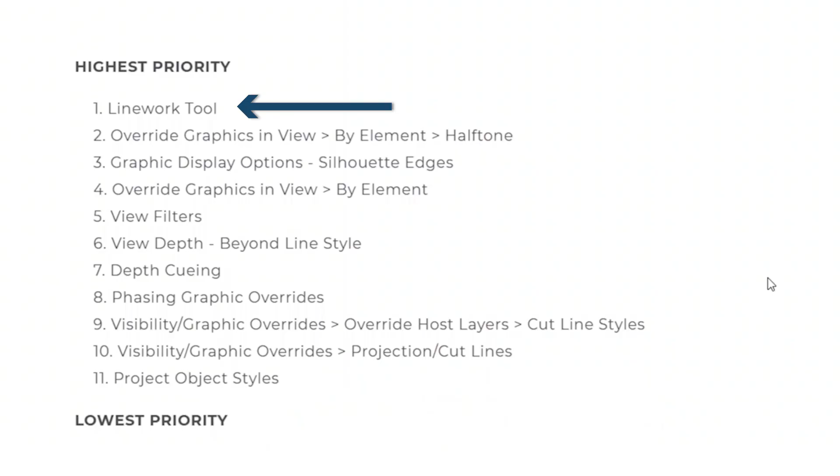So you can see we have this list here, highest priority to lowest priority, 1 to 11, so 1 being the most important that it's going to choose over any other graphic override, and 11 being the least important in Revit's eyes. So we'll start with number 11, project object styles.

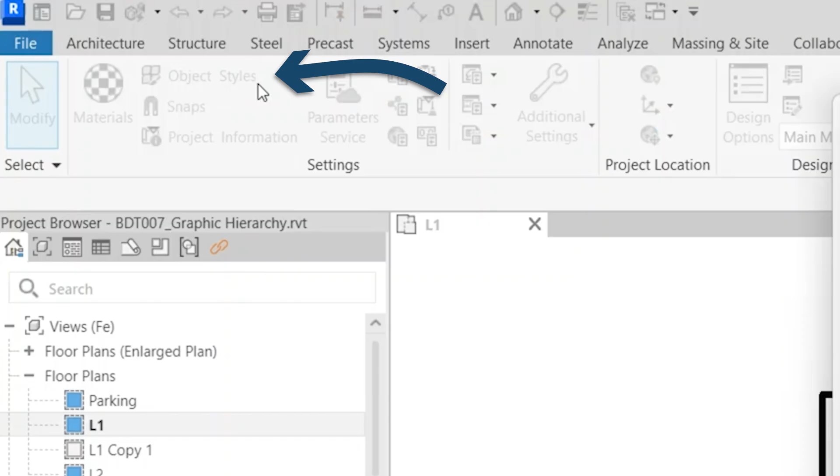So if we hop into Revit, really everything, the project object styles, they are the baseline for how Revit chooses to show an object. So this is, if nothing else is applied, this is how it's going to show. So where you access that is within the Manage tab, Object Styles. And here you can see a whole host of elements here. It's really going to show everything.

So right now we're in architecture. If we want to show more, we can add MEP, infrastructure. So these are all the actual physical elements. We have annotation objects, analytical model objects, and imported objects. To go back here, to take, for example, walls here. So we have the line weight, projection, and the cut lines.

Projection lines, so this is going to be things like in an elevation or a section view where you can see a wall in the distance, but we're not actually cutting through it. The cut line is going to be things like in the plan. So right now we can see these walls, they're cut pretty thick. So this is a level 5 line weight, whereas the projection line is number 2.

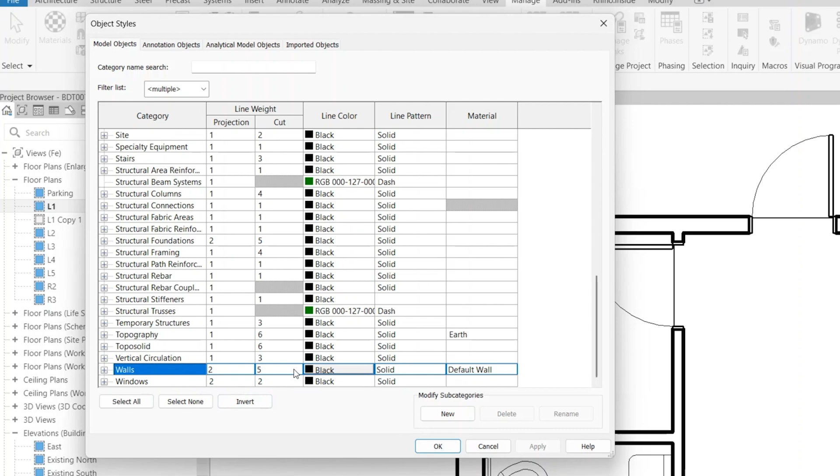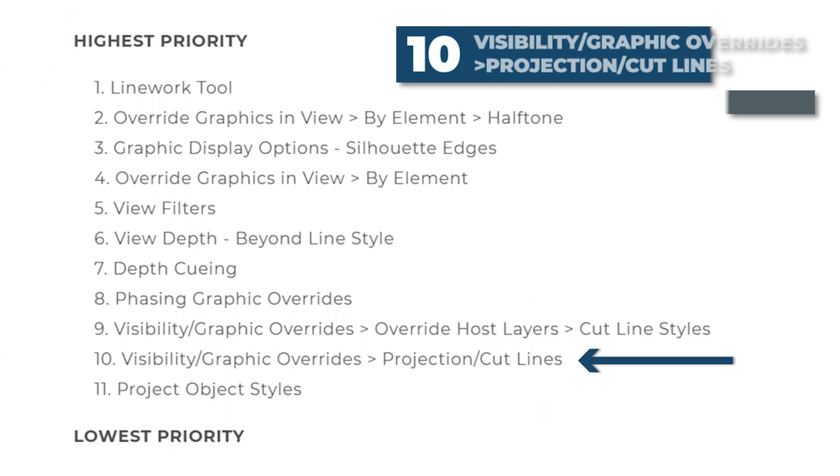So this is, again, it's the baseline. So this is how things are going to show throughout the project. And then the overrides are what are going to change them per specific views or specific view templates, things like that. So number 10, visibility graphics overrides, projection cut lines.

So where you access that is within your properties dialog box within Revit. You go to visibility graphics override. You can also hit VG on your keyboard. So if we come down, you'll notice this looks somewhat similar to the object styles dialog box, but there are more options here. So within here, you also get pattern and transparency control.

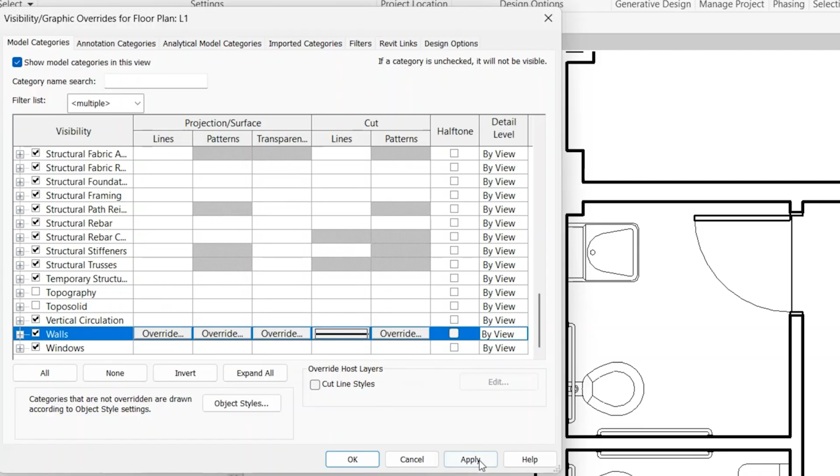You can do lines similar to the projection lines within object styles, but this is really going to be specific for that view. Alternatively, if this is applied to a view template, then that'll apply for all the views that view template is applied to. Cut lines, similarly, you can control the cut lines and then also the pattern. So click this override. Say we want it back to a number 5 line weight, click OK, apply. You'll notice that we're now back to the number 5 line weight here.

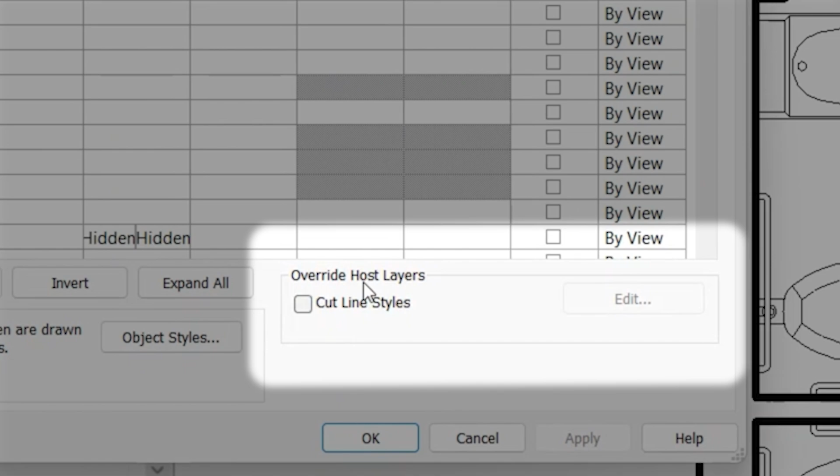Number 9, cut line styles. So this is within visibility graphics override again. You'll notice here, override host layers down here. We will click on cut line styles, click OK. So right now you can't actually see this because of the level of detail within the drawing. So to change that, we will go to the fine level of detail.

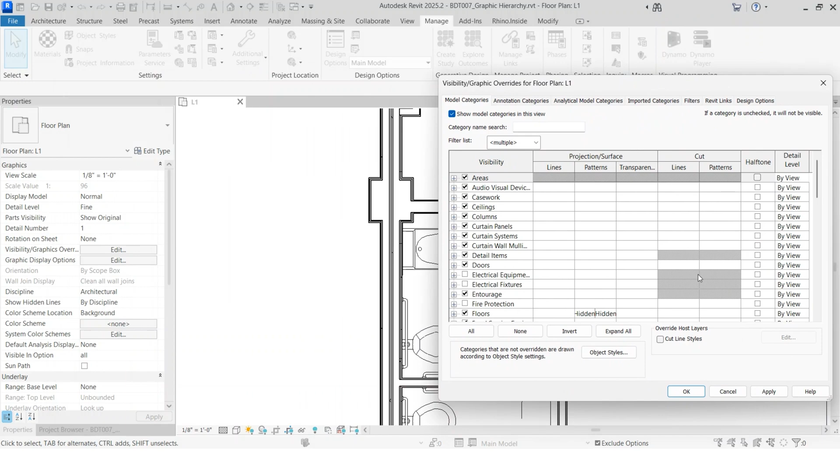So you'll notice now that when this is cut, we're cutting through all the different layers. So gypsum board, CMU layers, everything that wall is made up of, it's kind of made up of all of these different layers. So if we go back to visibility graphic override, uncheck this, click apply. So without the override here, you'll notice that we have really thick outline and then thinner interior lines of the wall assembly.

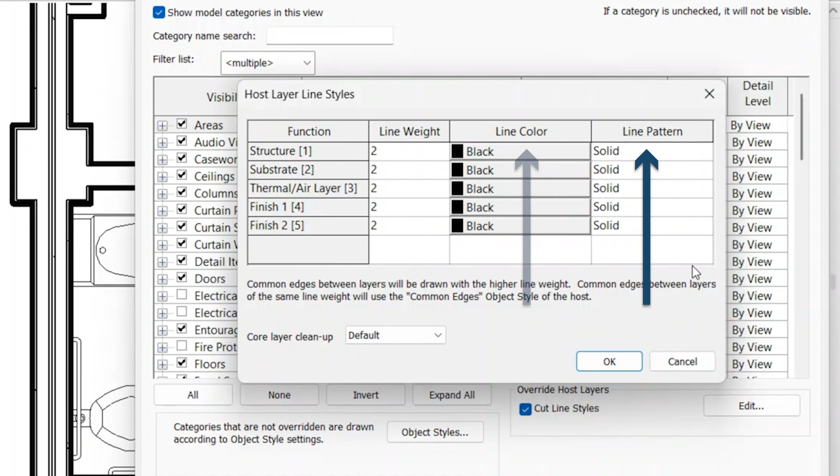So really what this override host layer does, if we click edit, you'll notice within here, this should look really similar for when you're building a wall, ceiling, floor, roof, things like that, those main assembly pieces in Revit. You'll notice that all of these have line weight control, line color, and line pattern control. So we're going to make another video for this, so we won't go into the details, but just know that this is one step above your normal visibility graphic override.

Number 8, phasing graphic overrides.

Within Revit, we have things called phases. So this is really for projects that have multiple phases, or say you're in an existing building and you're doing your new project. So you have things that are existing, things that are new, things that are being demolished, things like that. So within here, under the Manage tab, Phases.

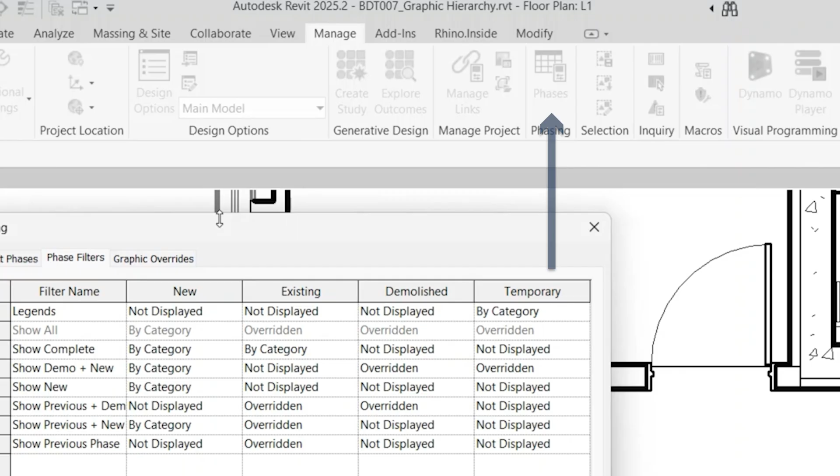So within the phase filters, there are quite a few different settings that we can have applied here. Within this, we can show all. This is generally just going to show everything. So over here, it's essentially saying, how do you want to show that particular thing? So right now, by category, that's saying don't have any override.

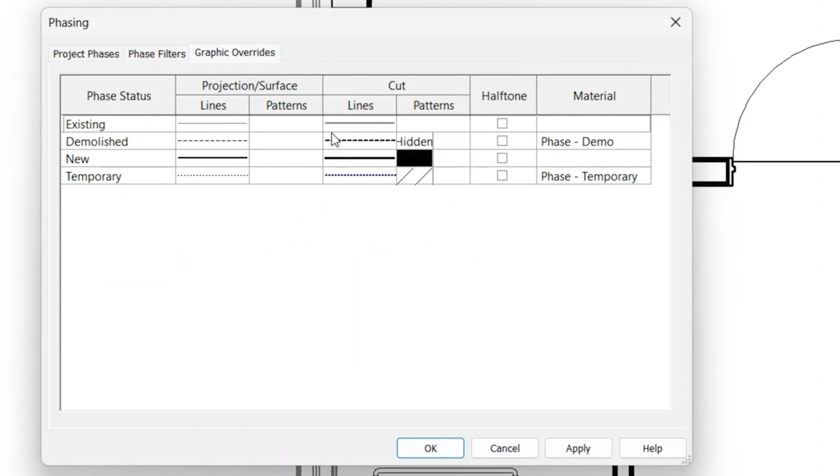If we switched it to overridden, then whatever we have in these graphic overrides here, it's going to show it with that value. If we have an override for a line projection, pattern, cut, things like that, it's going to show that. And then not displayed, it's just not going to show it at all. For example, show complete, we're not seeing any of the demolished or the temporary work. So we'll go back to this.

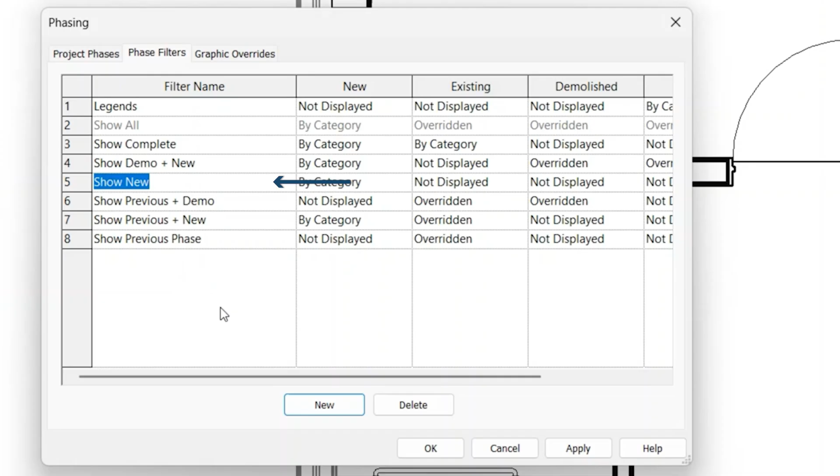So within this, we have loads of different things here. So show demo and new, we want to see the new work and the demolished work. Show new, so we're only showing new work. Show previous and demo, that essentially means that we're going to see the existing building and what's being demolished.

Show previous and new, so that's going to show us the existing building plus the new construction, but it's not going to show us any of the demolished elements. And then show previous phase, so that's going to show us the phase previous to the one that we're in.

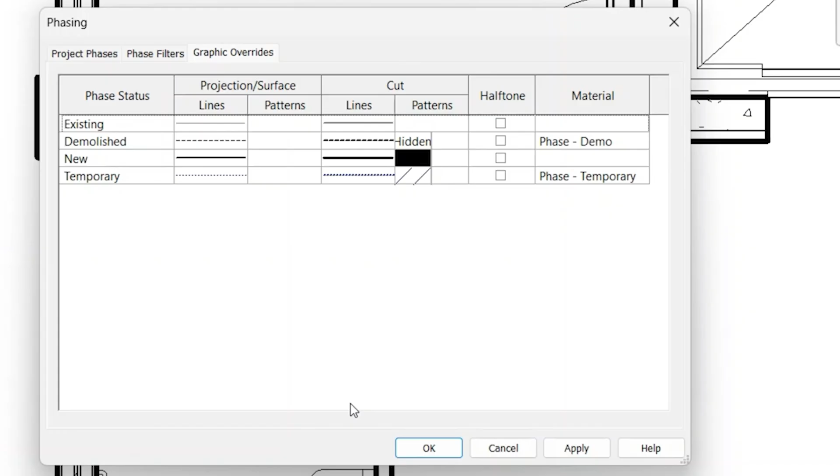Graphic overrides. So you'll notice here that you actually have the option to change an object's appearance just based off what phase they're in. Let's go ahead and leave these as they are, and then we can play with these. So if we click on a wall, right now it's phase created, new construction, and it's not phase demolished. So let's go ahead and change this to existing.

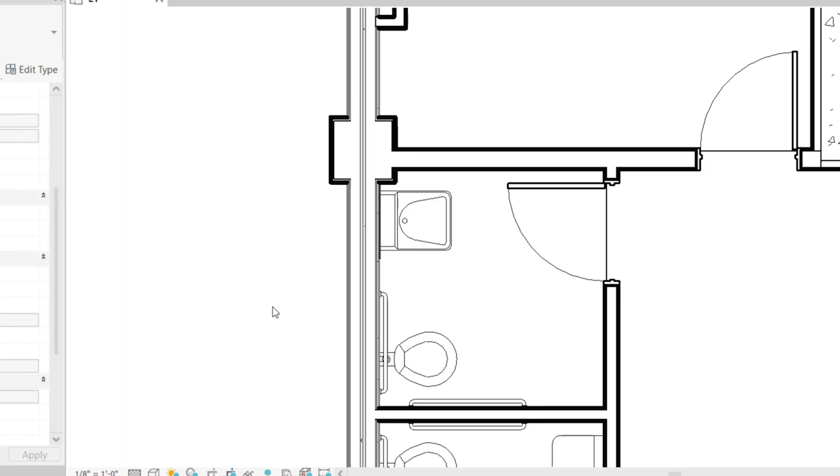So now that this is existing, you'll notice that this whole wall just turned gray. Essentially what that's doing is telling the contractor or whoever's reading the drawings that this is an existing wall. Similarly for the previous ones, you have both lines, patterns, and then projection versus cut. You can halftone it, so that's a setting that you can set. So that actually reduces the value of that color.

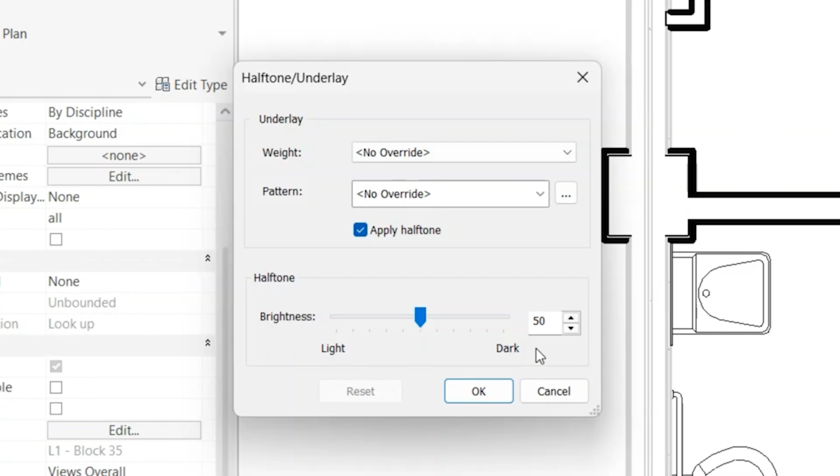So where you set that is in additional settings, halftone underlay, and then here, halftone, you'll see brightness, light versus dark. So if we go all the way dark, click OK, it'll go back to that original gray color. If we go back into halftone, go all the way light, it gets extremely light. So within that, we also have some other things here.

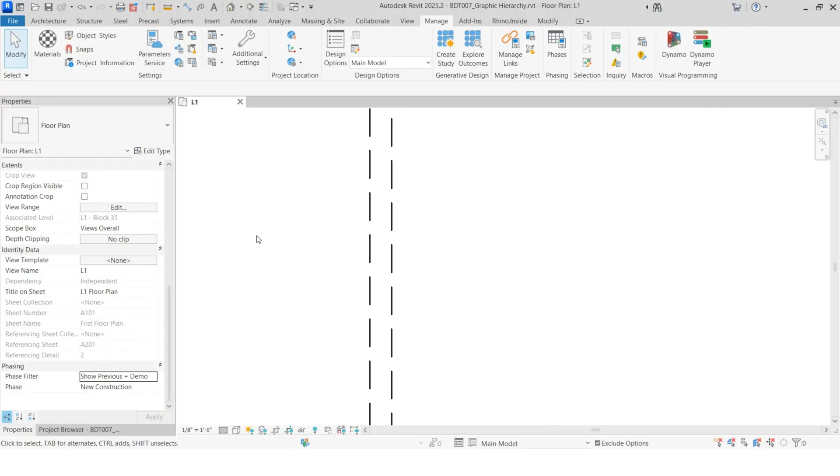So demolished, let's check that out. So let's say this wall is now supposed to be demolished in our new construction. So you'll notice now that you can't actually see it. That's because this view is not set up to see that. But if we switch over to our demo view, you'll notice now that this wall is scheduled to be demoed.

So new, if you're overriding this, it's going to show everything that is new construction as a singular line type or material or halftone. Our temporary, so this is an interesting one. So level 1, let's say we have a temporary wall that we want built out for construction purposes. We can show this as being built during the new construction, but then once construction is complete, we actually want that removed.

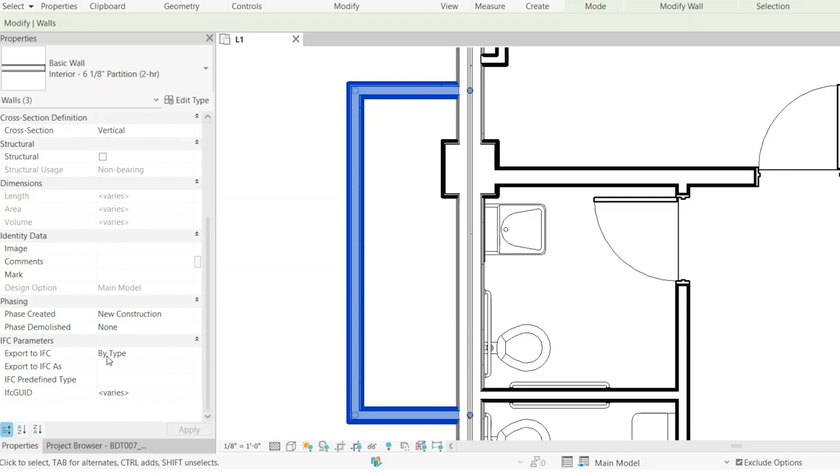So if we do phase created new construction and phase demolished new construction, here it's disappearing, but we will want to change our phase filter to show it. So currently we are set up as show previous and new. So let's go ahead back to our phase filters.

So right now you can see temporary is not displayed. Let's go ahead and switch that to overridden. Click OK. You'll notice that it's now showing it in this particular way because that's how the overrides for temporary elements are shown.

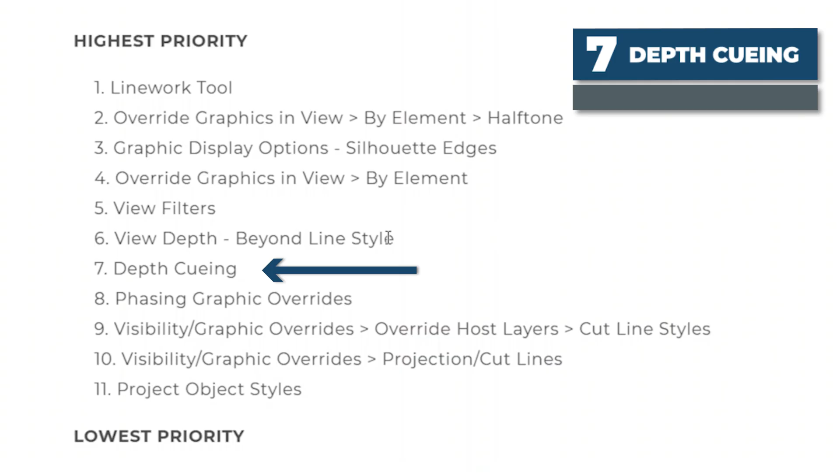Coming back to our list, number 7, depth cueing. So this is an interesting one. It's really quite helpful in more presentation-based things. We'll show this in an elevational view. So if we look here, and maybe just a little bit of context in this model here.

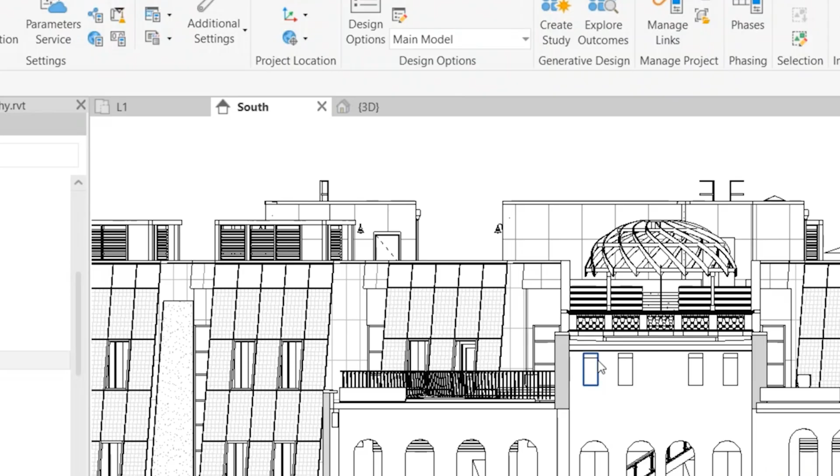So there are quite a few layers here. There's an existing building front. We have a secondary layer here of some more buildings and then penthouse areas. So essentially what we're seeing here is a lot of information that spans over potentially quite a bit of distance here. But right now, the way that we're set up, we're actually showing everything all as black and really strong. So it's kind of hard to understand depth within this drawing.

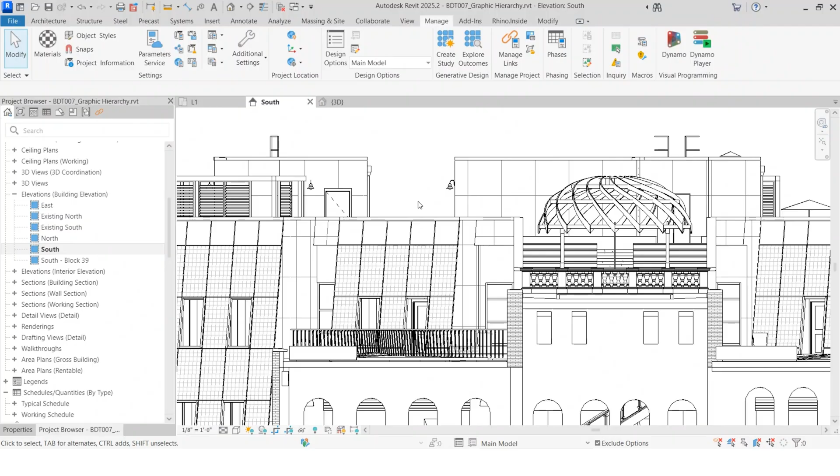So depth cueing essentially starts to fade out some of the portions in the background, and it really lets the pieces in the front start to stand out. The way that you access this, at the bottom here, you click on graphic display options, click on depth cueing, and then check the box that says show depth. Click apply. And now you notice that once we clicked apply, a lot of the stuff in the background started to gray out, almost like a halftone. And you can start to read the stuff that's up front much better.

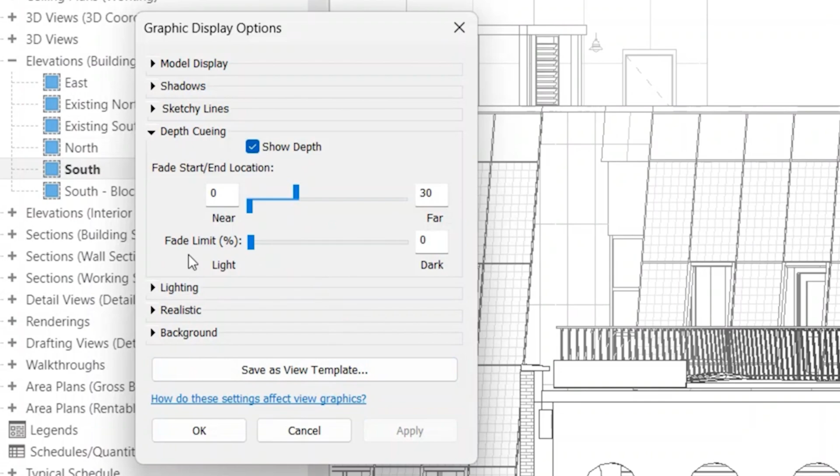So there are some options within this. This here, fade start end location. You can start to play with this and really see how it works. It controls how much the objects in the background and foreground are faded out. And the more you play with this, the more you can see. There are definitely some advantages of doing particular things over the others.

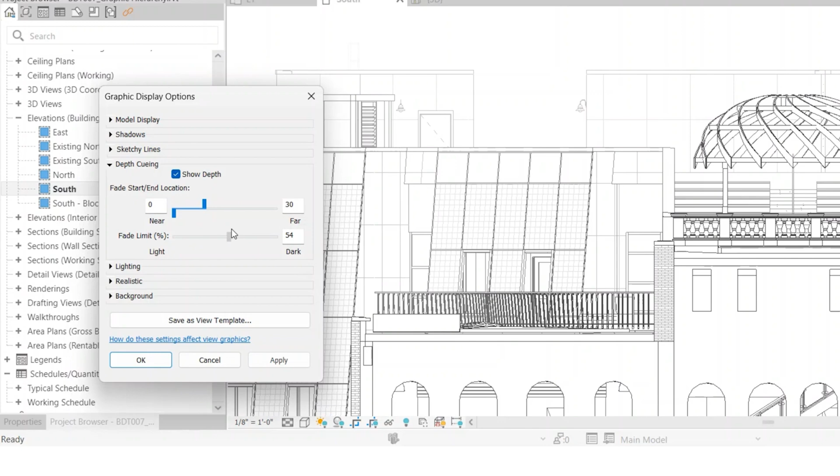And then there's also the fade limit percentage. So right now we're at 0%, so light, and then if we go all the way dark, click apply, you'll see that comes really present again. So this essentially just shows the limit of how light it's going to make that furthest element.

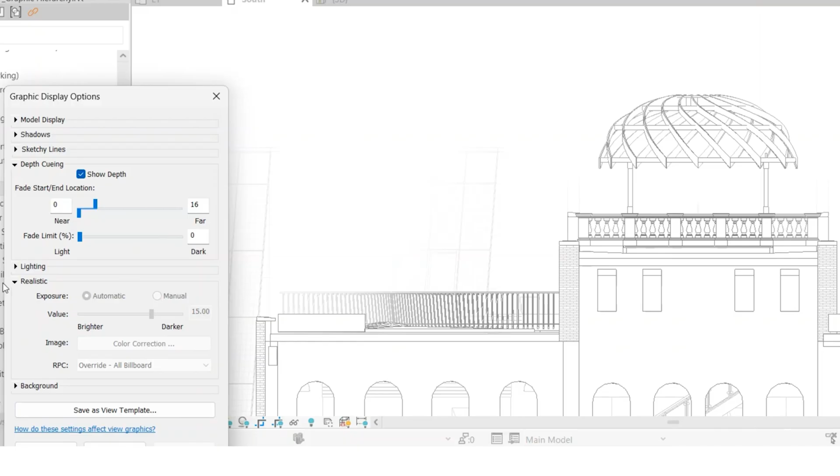If you play with this slider a bit, you'll start to notice that you can completely fade out certain objects here. If you get to a depth that is shorter than the furthest elements within the model, it's actually going to completely hide them. But as you start to grow this a bit, you can see more and more elements. For example, this guardrail here is barely visible, so we know that's right at the precipice of where this limit is set. And then fade. We can control how much that actually fades things out.

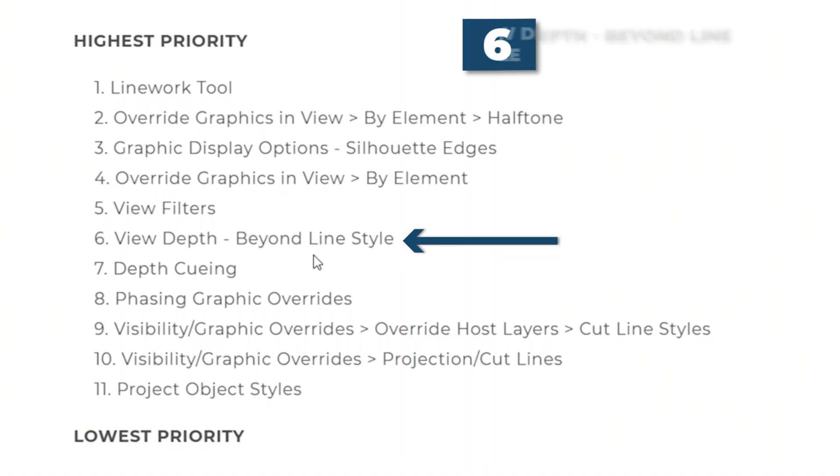So number 6, view depth beyond line style. This is also an interesting one. Let's go to a different level here. There are some objects that are low. This right here is a double height opening. You can see a corridor here, stairs that are going downwards, and then double height stairs. Right now you can see there are some objects, some additional stairs, and some guardrails.

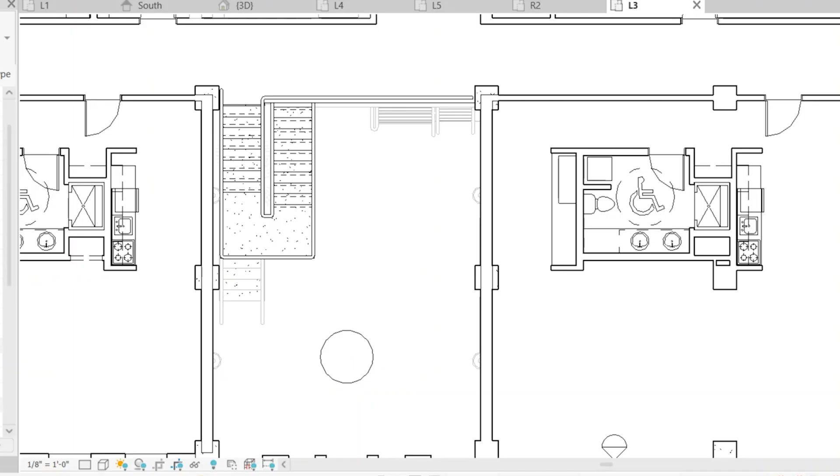Essentially what view depth is doing is showing the objects that are in that further distance as a lighter color. It is a little bit different from depth cueing; it works in a different way. So if we go to our view range, click edit, and then show here, you'll notice that Revit has this diagram, and it shows you all of the different categories that are associated with these parameters. You'll see here, number 6, view depth. View depth is essentially this area in yellow.

Just to explain some of this, your top one, the primary range top, is this parameter here. It's essentially where the camera is set up when you're looking down in a plan. Number 2, primary range cut plane. That's this line here. That's actually where you're making your plan cut, whether that's cutting through a wall, door, window, etc. That's where that cut's happening. And then your camera's up here looking down.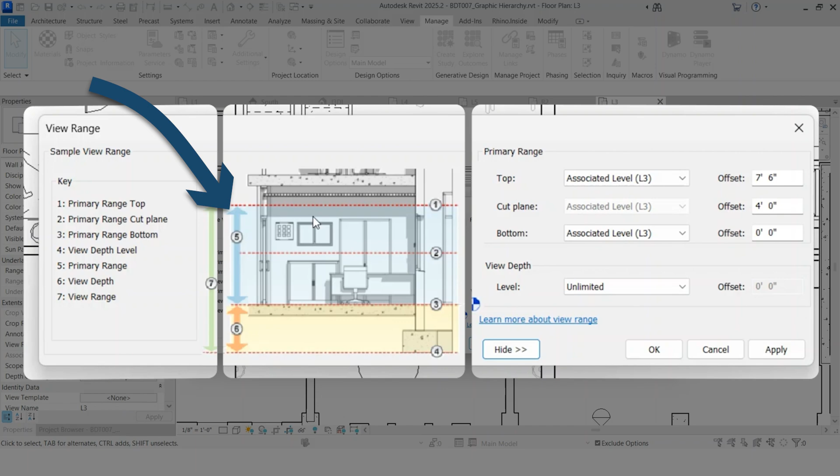Number 3, primary range bottom. Typically this is done at the floor level that you're looking at. This is the primary depth at which it's going to show things in detail. Number 5, primary range. This is essentially from the top to bottom, that entire space right here. So view depth is this yellow area right here, and that is controlled right here, view depth level. Right now I have this set to unlimited. That's essentially going to show everything in the entire model that is below this cut line.

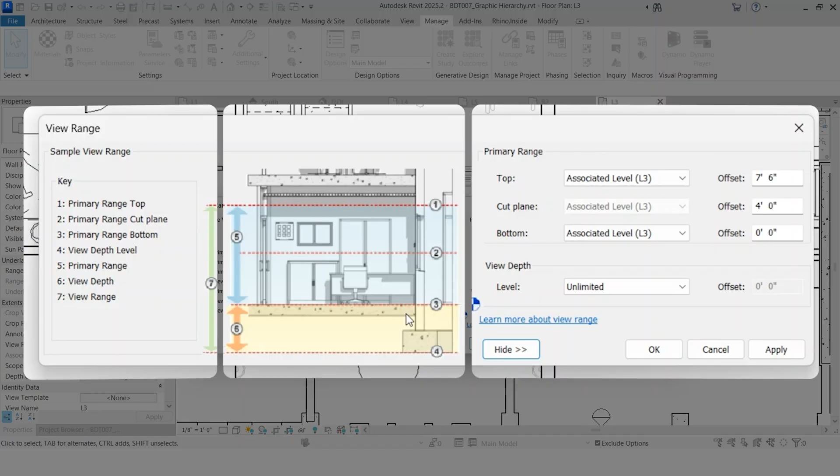And then view range, it is the entire range of this top level all the way to this level here. Where the view depth beyond line style comes in, essentially what's happening is the override is everything that's in this yellow box right here. It's going to show as our beyond line style.

So if we click OK to get out of this, within the Manage tab, go to Additional Settings, Line Styles, hit the little plus button. So now we'll see that we have our Beyond here. It's a default line style that Revit has. So you can't actually remove this from the project because it is something within the system of Revit.

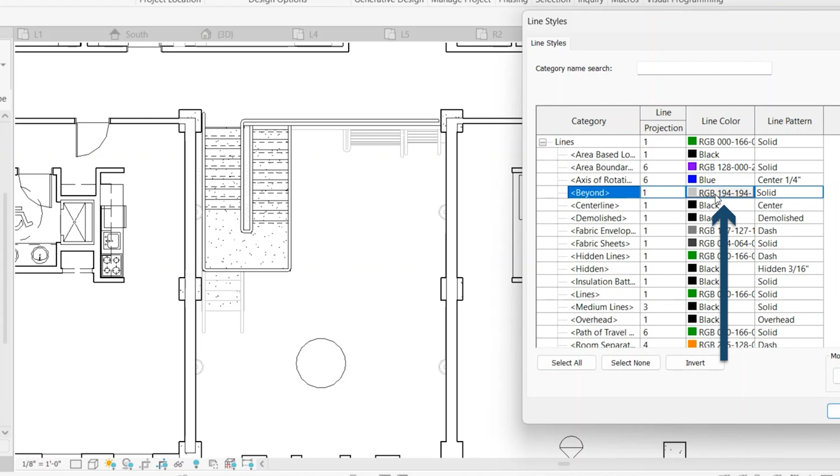So right now we can see that we're set to this light gray, and that's essentially what this is pulling from. So if we click on this light gray, and just to show the power of this, if we change it to red, then we go back and click apply, you'll notice that everything that was in that yellow range, so to pull that back up, everything that is within this range here, it's now being shown as red.

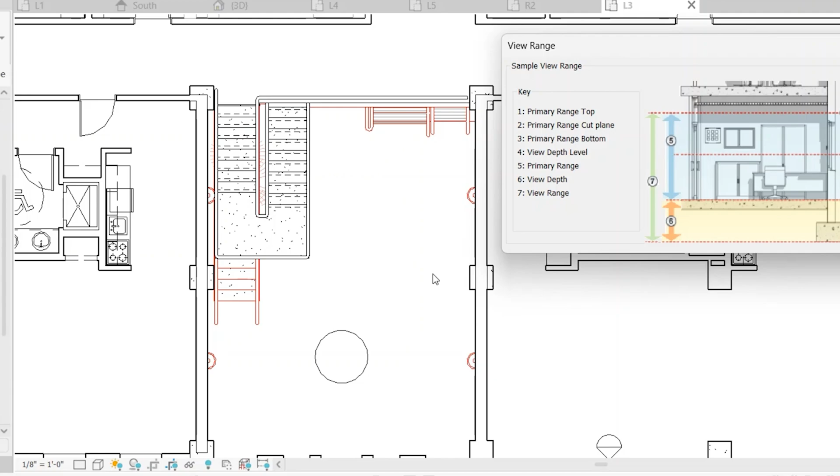So it's essentially just telling it, all right, this is just background information. We want to see this in a lighter style, in this case red. Yeah, so that can be really powerful. And the way that this differs from the depth cueing: that actually makes it a rasterized image, whereas this keeps it as vector graphics.

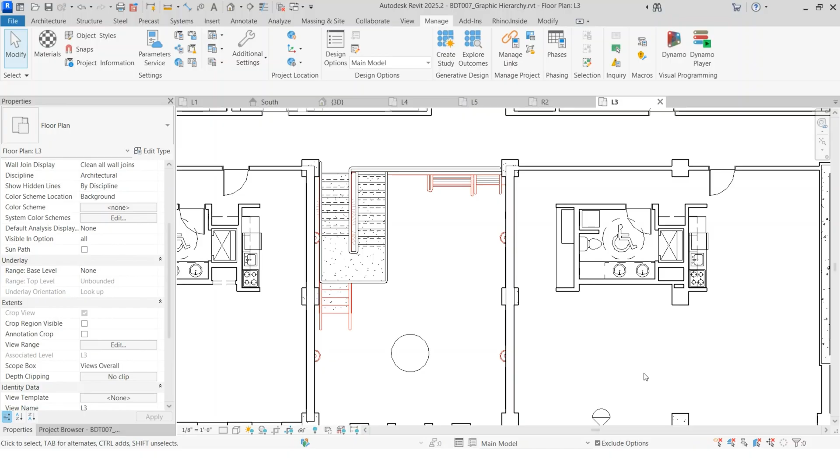So it can be really difficult if you go to print as a full construction document set. It's going to be difficult in PDFs to snap to any vector line work, and potentially some issues with taking measurements or just reading a clear vector image as a construction document. It might cause some confusion or even cause some errors within the field.

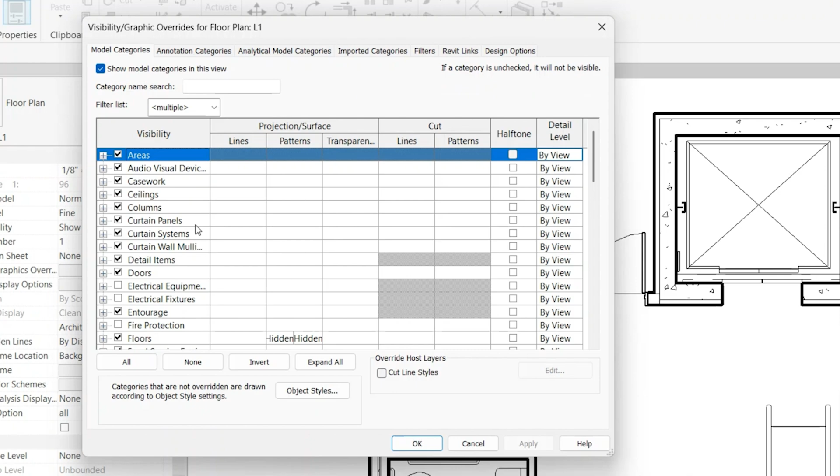So number 5, view filters. This is controlled under visibility graphics override again. If you click on the tab filters, you can see it here. Essentially it's a way of changing certain types of a category, but not all of them. If you change something here, it's going to change everything of that category. So everything that's a ceiling, it's going to change. If you tab over into filters, this is going to allow you to select certain things.

For example, if we wanted to show concrete walls, we can go to edit, new, do new, walls_concrete, click OK. So the way that you do this after you've created a new filter, categories here. So this is going to have all your typical Revit categories. Scroll down, select walls. Within here, we are now selecting all walls.

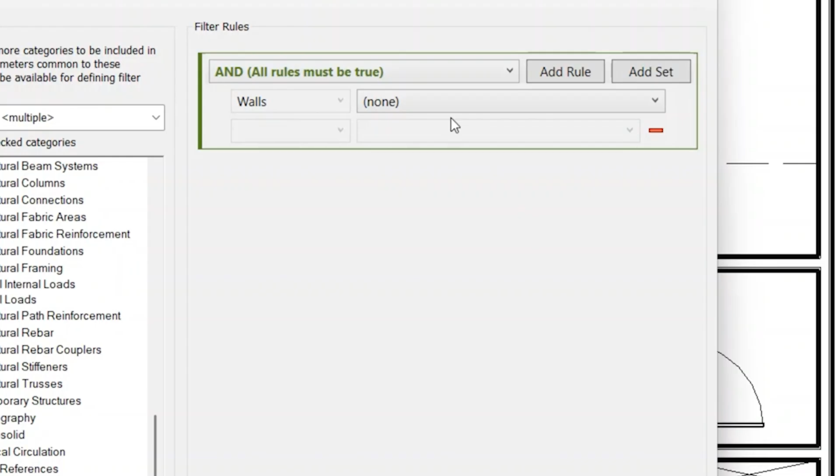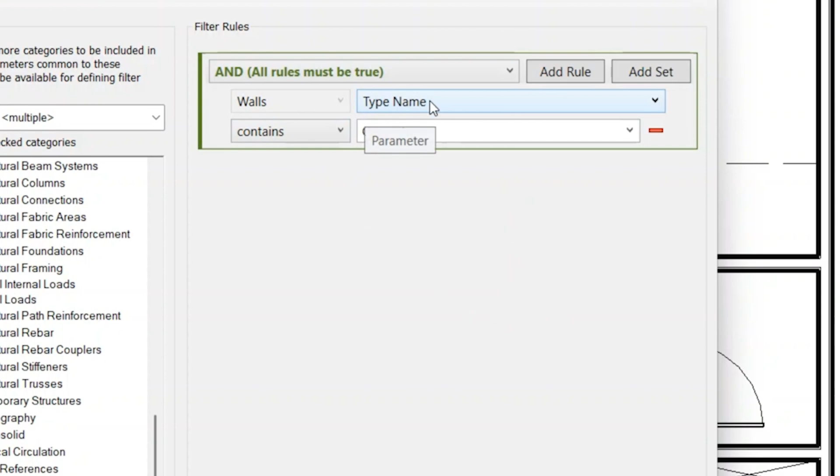You can select by which parameter you want to choose from. So let's choose from the type name. Here, it allows you to choose the way in which you're selecting it. So for example, we want to search for concrete. So we're going to select type name contains concrete. So now essentially what we're saying is search for all walls in this view, search by type name, and if it contains concrete.

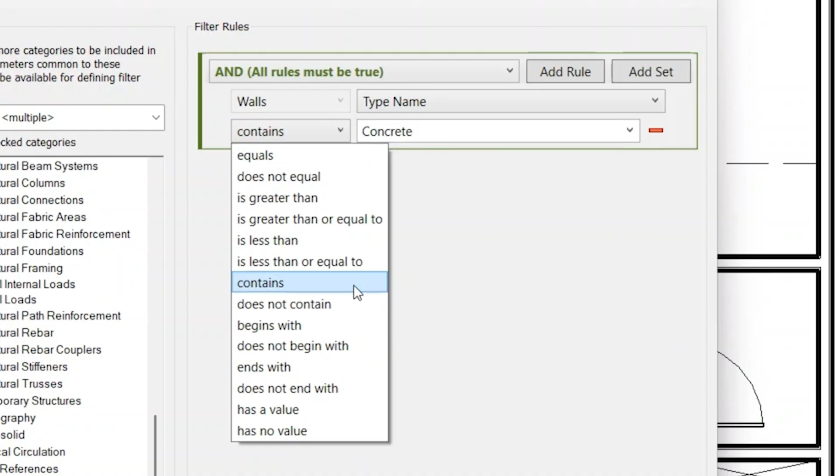So you can kind of go through this list and understand exactly how each of these work. It generally has the negative of each one. So what I mean by that is does not contain. If we switch to this, we'd be saying search for all walls that aren't concrete. And it also has some that are good for parameters that are length or number based, whether that's dimension, quantity, things like that. You can search by that as well.

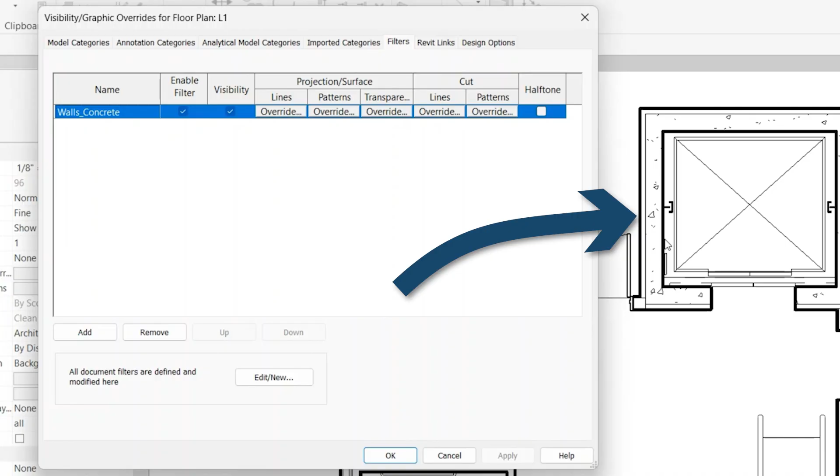So once we have that set up, we click OK, click Add, scroll down, find our filter that we just made, and click OK. So now it's going to add it here. This should look familiar at this point: projection line, pattern, transparency, and then our cut lines and patterns, and then also halftone. Once we're there, we can click on any of these to change them. Let's say we want to add a light background to all the concrete walls. We're going to click on our pattern.

Do a light gray, click OK, and OK. So once we do that, let's click Apply. Now, all the walls that have concrete within their type name are going to receive this gray background.

To show off some of this other stuff, right here, this checkbox, visibility. What that's going to do is completely shut off all the walls that meet this filter criteria. Let's click Apply. It's going to completely hide that from the project now. That's really nice if there are certain things that you actually don't want to see within a view. So let's say we wanted to hide all the finishes because they weren't important to that view. That's a good way to do it.

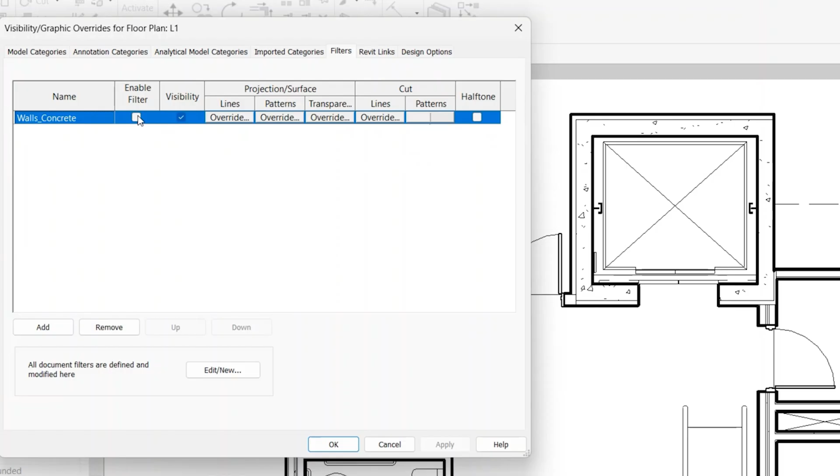And then this checkbox here, enable filter, if we uncheck it and click Apply, it's going to completely shut down everything within this filter. You can think of this as an on-off switch.

Number 4, override graphics in view by element. So if we click on an element, right click, go to override graphics in view by element. These should also look pretty familiar, it's all the same categories. But let's say we wanted the color of the walls' cut line to be red, click Apply. You'll notice that this wall now turned red.

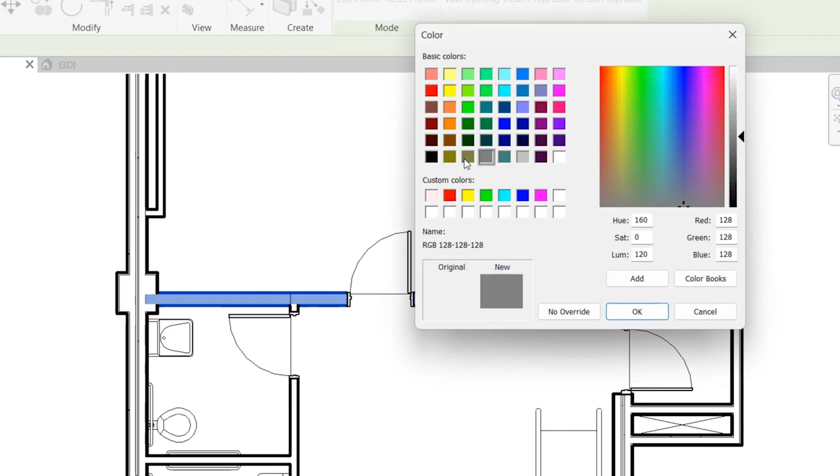Let's reset that. So if we do the same operation and then click on category and do red, click Apply, you can see that it's now adjusting every element within that category. So in this instance, walls, it's now showing them as red. This can be really nice if you have something very specific for all the walls or windows or doors in the project or within that view that you wanted to show, but not particularly in other views.

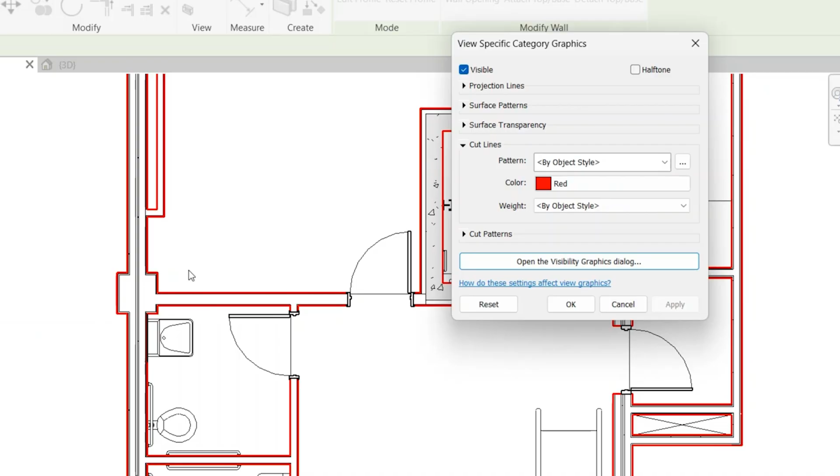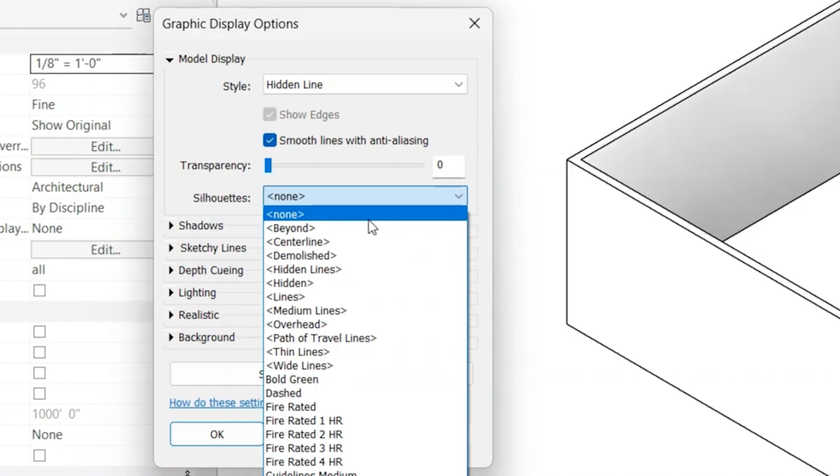Number 3, graphic display options, silhouette edge. What this one does is allow the outline edge of objects to be thicker than the other lines within that same element. To display that, we click on the visual style button, graphic display options. Within this first dropdown, you'll see silhouettes, do the dropdown, and this is the line styles within the project. We'll go ahead and click wide lines and then Apply.

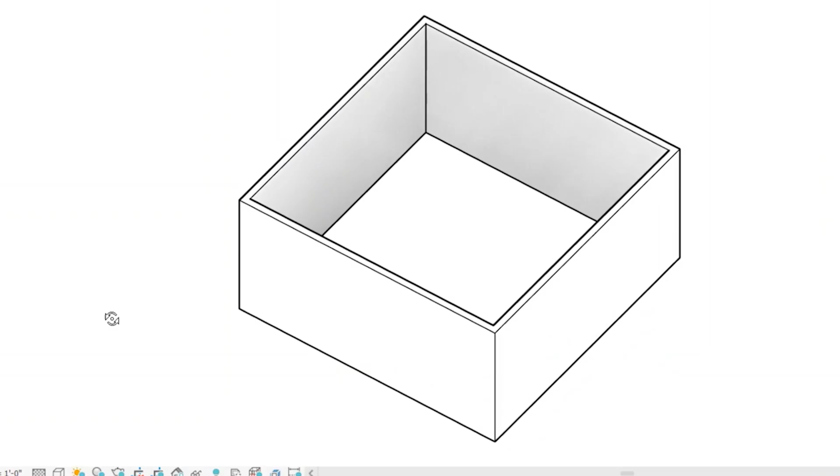You'll notice that all of the lines along this border are now thicker. You'll also notice that some of the lines that appear in front of other objects are showing thicker as well. If we zoom around, you'll notice that this actually changes when you start to move around. This is a really dynamic way to give some emphasis to objects within the project, and it's really helpful for presentation drawings as well.

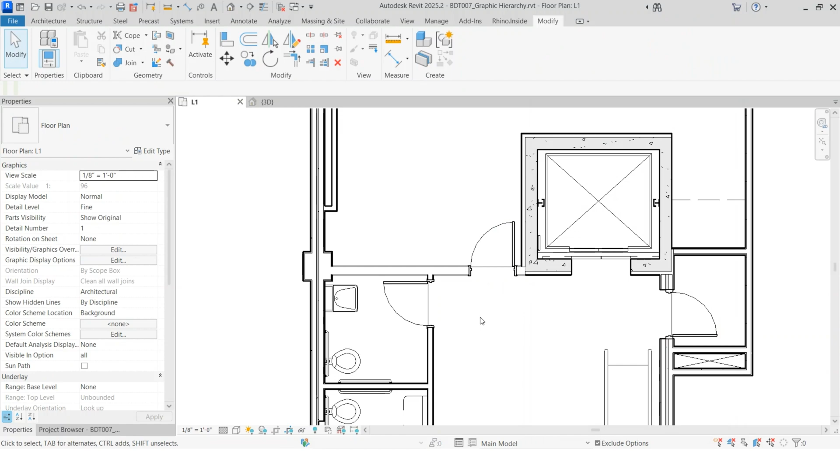Number 2, override graphics in view by element, halftone. This is essentially within that same override graphics in view by element, but it's really just a halftone checkbox. So if we do that, click override, it's going to even override some of the other overrides that are within that same dialog box.

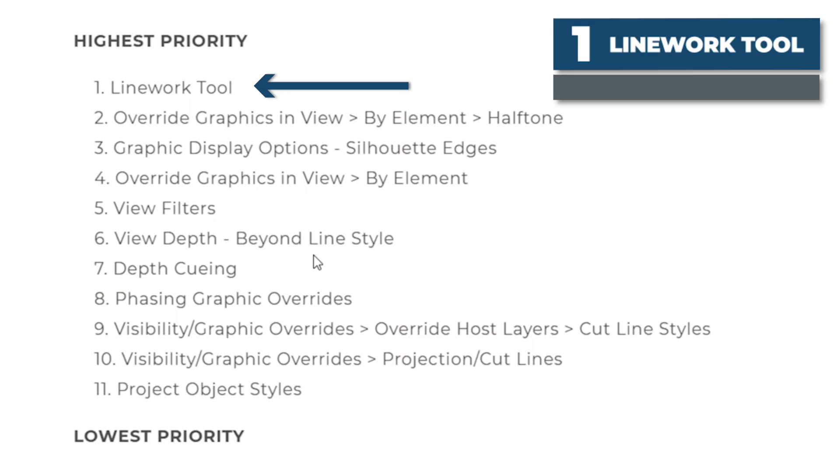And then the last one, the line work tool. This is the highest priority that Revit gives to any override tool within the program. In the Modify tab, in the View subcategory, you'll notice Linework. So you click on that. Within the line work tool, you can choose any of the line styles that you have in the project.

So let's say we wanted to do a dashed line. Let's show it for one of the lines in the wall. Now you can see that it's just overriding the one that we clicked on. The other outline here, you can tell it still has this thick line, whereas this one that we selected is now dashed.

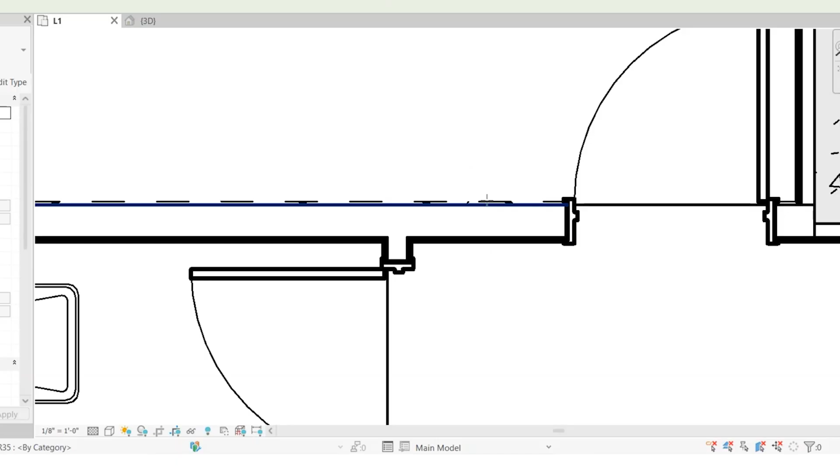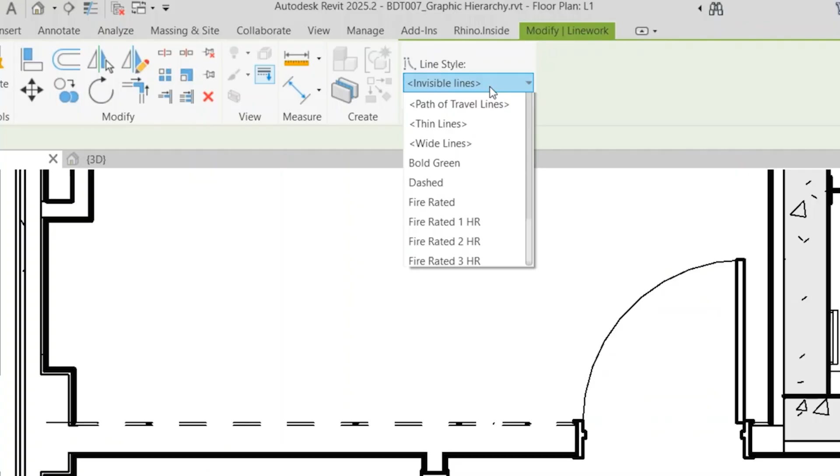You can also come here and click on invisible lines. This will allow you to hide particular lines within the view. So let's say we wanted to hide this floor line. Click on it. Now you can no longer see that line of the floor, but if there was another area we wanted to see, it's still showing. So it's really helpful to be selective on what you're showing within the project. If you wanted to undo this, you would go to by category, and then select the lines that you want to restore to normal.

We have all this information available on our website within our Revit Resource Center. This is super helpful for me. I use it all the time. It's particularly useful if you have something that's overridden in a view, but you can't figure out why. I typically will come here and just go down the list, starting from 1, checking each one, and that typically helps me figure out what the issue is. You can bookmark this. I typically have this bookmarked, and whenever you run into that issue, it's really simple to click here, and then you are in the correct place.